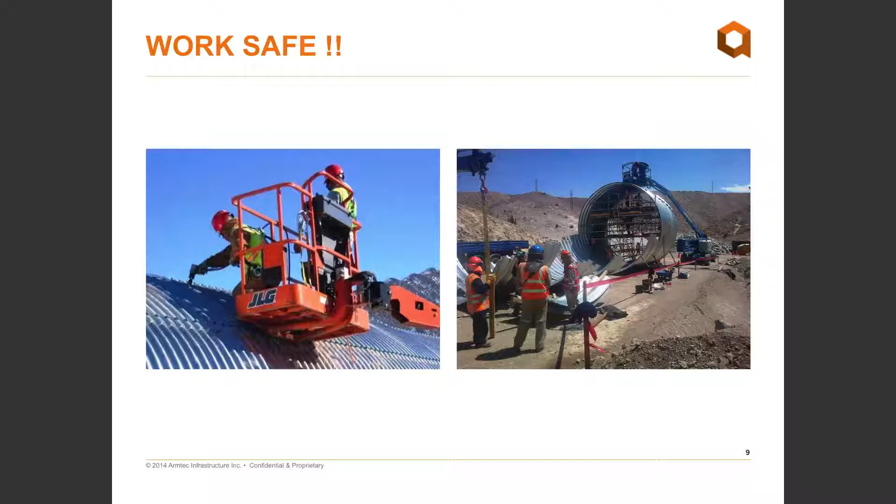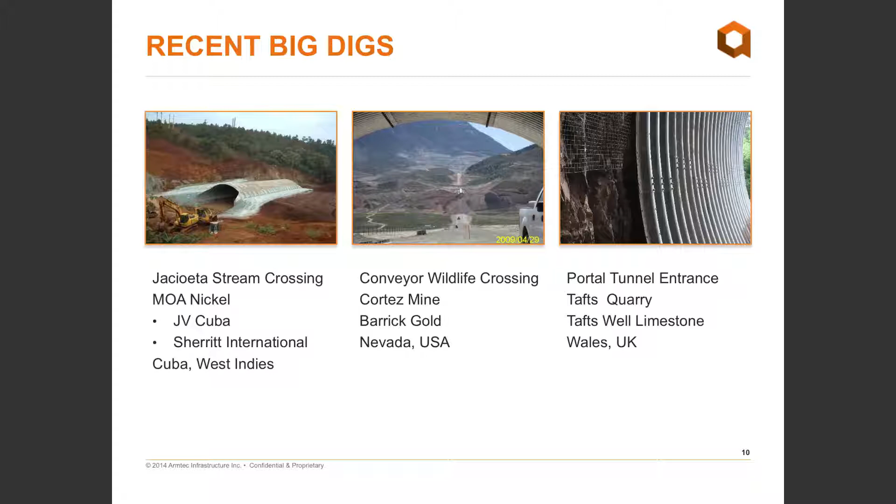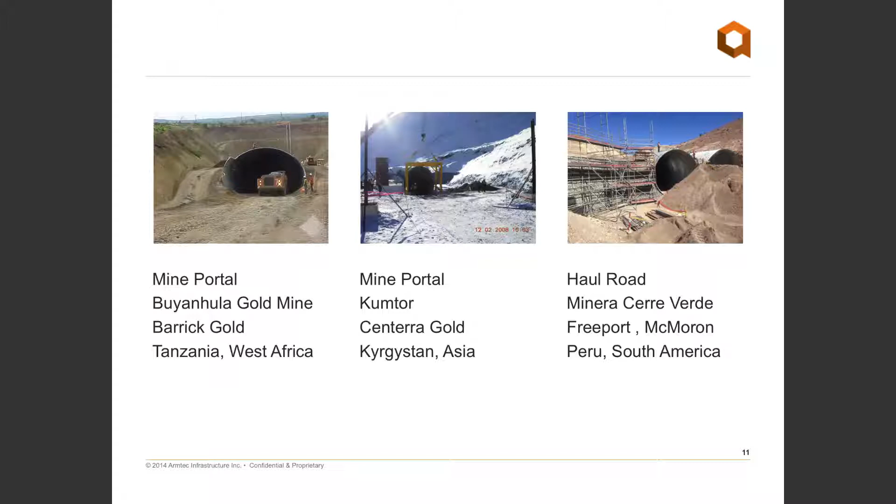All right, let's start with a quick look at some of Armtec's mining projects. At first, we had a Jacioeta stream crossing for Moa Nickel in Cuba, a wildlife tunnel crossing at Cortez in Nevada, some of the other projects in Wales, a portal entrance at Taft's Limestone Quarry, Bulyanhulu Mine Portal was indeed a big dig, some 30 meters deep in Tanzania, and one of the coldest portals high in the Tian Shan Mountains in Kyrgyzstan, the Kumtor Mine. And finally, Peru's longest running copper mine, Minera Cerro Verde, in Arequipa.

All right, let's get started by answering a very simple question. What is structural corrugated steel plate? We start with hot rolled plate, slit it to the correct length and width, then corrugate it into one of two profiles. The smaller profile showing above is generically known as structural corrugated steel plate. We call it multi-plate. The corrugation is 152 by 51 millimeters, or 6 inch by 2 inch, and was first developed by our predecessor Armco in 1931.

Underneath the multi-plate is what is known as deep corrugated structural plate, or bridge plate. If I use the term deep core, it's the bottom corrugation I'm speaking about today. It is truly a metric corrugation profile, 400 millimeters by 150 millimeters deep, and was launched by Armtec in the 1990s.

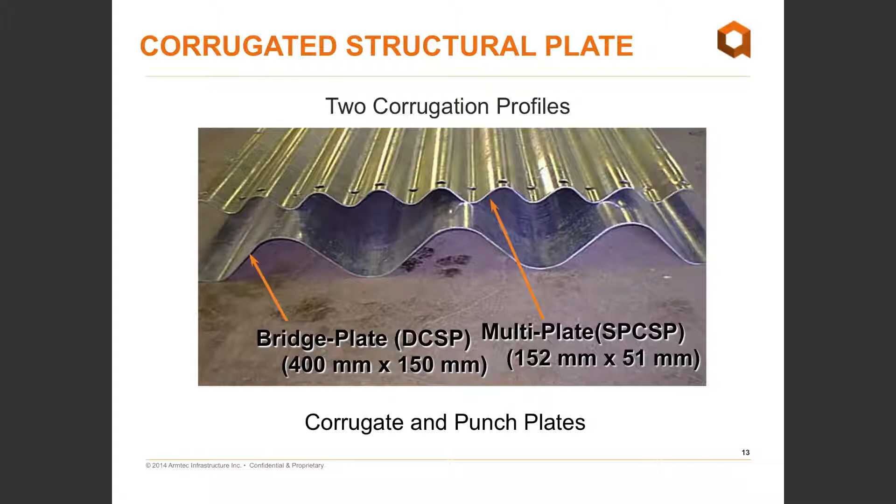After the plates are corrugated and punched, they're curved to the shape required. It's this ability to curve the plates which makes the product so versatile. By simply altering the curvature, we make a wide variety of shapes and styles which can be bolted to make the final makeup of the structure. Shapes can include circles, arches, ellipses, and high-profile arches.

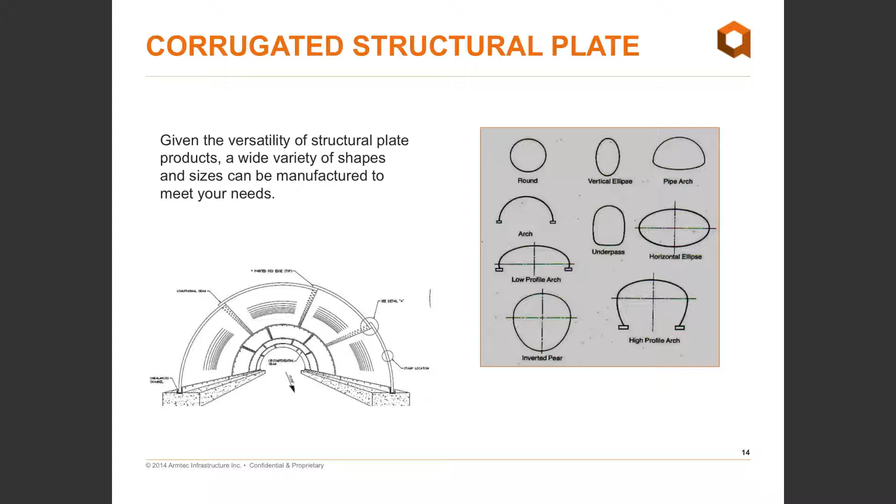After galvanizing, the plates are nested and placed on flatbeds into shipping containers. So whether you choose multi-plate or bridge plate, the structure is shipped in conveniently nested bundles, allowing easy delivery to remote sites.

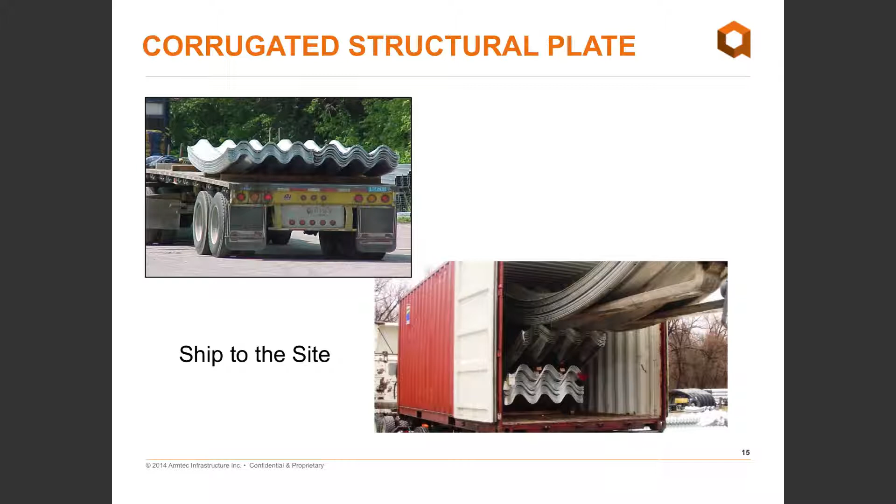Once on site, the plates are quickly assembled according to the drawings that we supply, and the pile of plates, in this case, becomes a bridge.

All right, let's talk a little about the history of the structural plate. Corrugated steel pipe has been around for over 100 years, having been developed in the late 1890s. Some 30 years later, in 1931, segmental bolted structural plates were introduced by our predecessor, Armco.

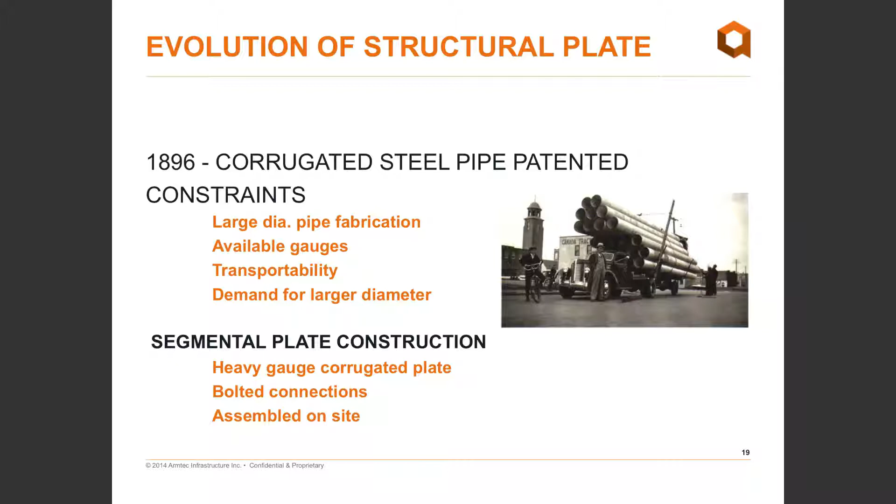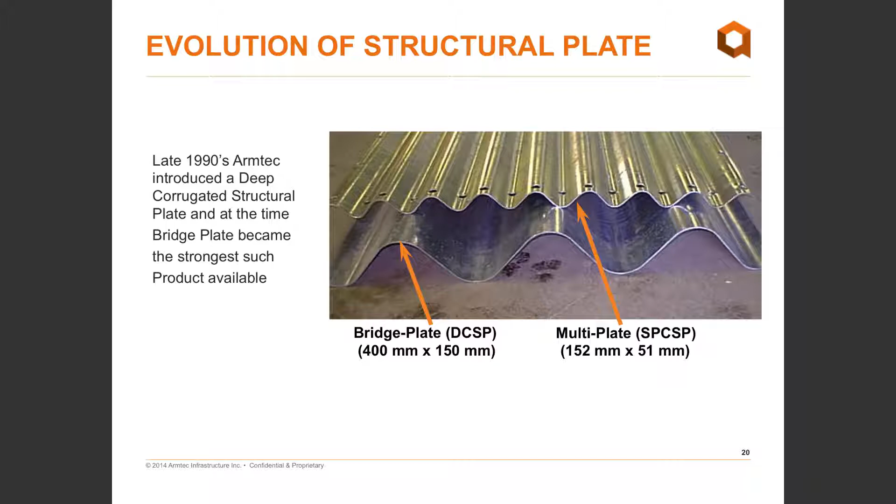From the 1930s to the 1990s, the multi-plate corrugation served the needs of the industry, but as heavier trucks, wider spans, and more demanding needs arose, Armtec developed deep corrugated bridge plate. Deep corrugated structures are 3 times stronger and 10 times stiffer than traditional structural plate, and that helped extend its use into the heavy mining sector.

Increased spans, heavier live loads, and lower cover could be better accommodated with bridge plate. While the added strength is important, extra stiffness also brings an advantage that we're going to talk about a little bit later.

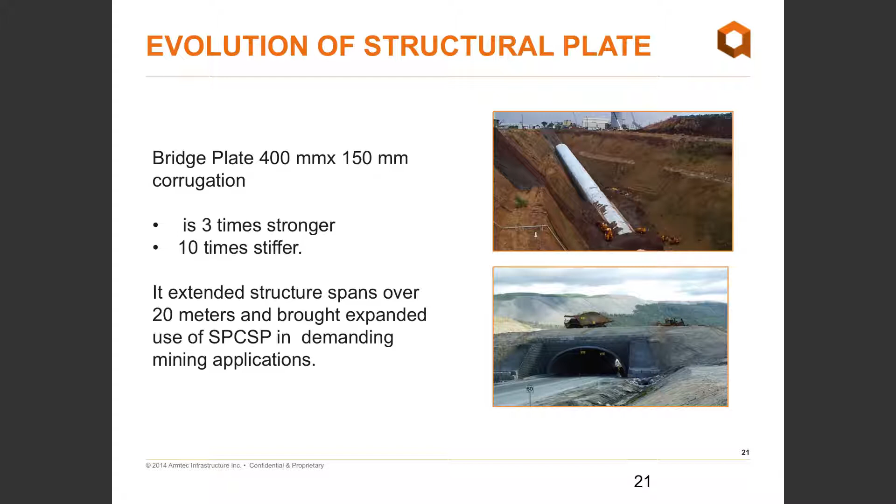A little bit to start on flexible steel design. Any discussion on the design of corrugated steel pipe must begin with the Handbook of Steel Drainage and Highway Construction Products. The original edition was published in the 1930s as the first handbook of culvert and drainage products. Several editions and over 80 years later, the handbook remains the primary source for engineers.

The book is published today by the Corrugated Steel Pipe Institute in Canada and is available through there. The gentleman certainly to talk to is Ray Wilcock.

Let's review the basic design procedures. In the 1920s, the original design procedure was set forth using the Marston-Spangler formula. Over the years, the design evolved into more sophisticated methods which recognized crushing and buckling. However, ring compression theory always has and still does remain at the core of the design.

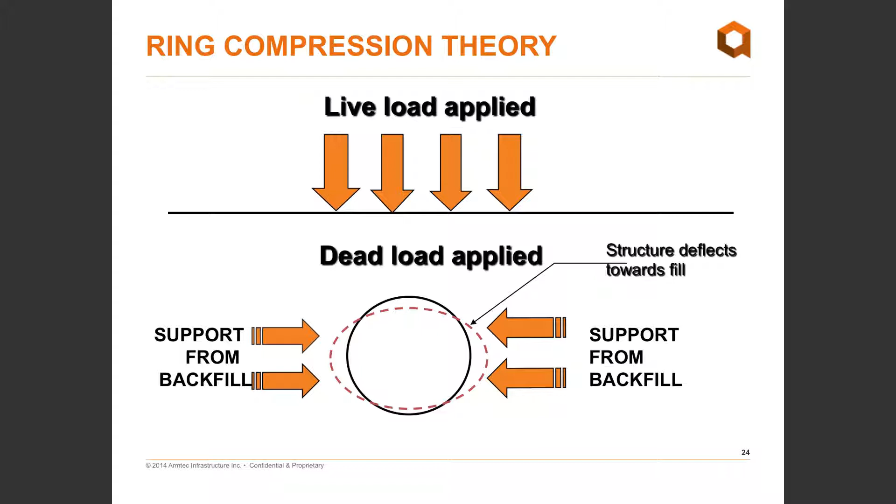In ring compression, a load is applied downward on the structure. The outward flex of the structure mobilizes the passive resistance of the soil and provides support. The thrust is distributed equally around the perimeter of the structure, and the pipe acts as a series of columns, each one in compression. Looking at this in the field, the thin wall pipe is highly effective in supporting axial compressive loads.

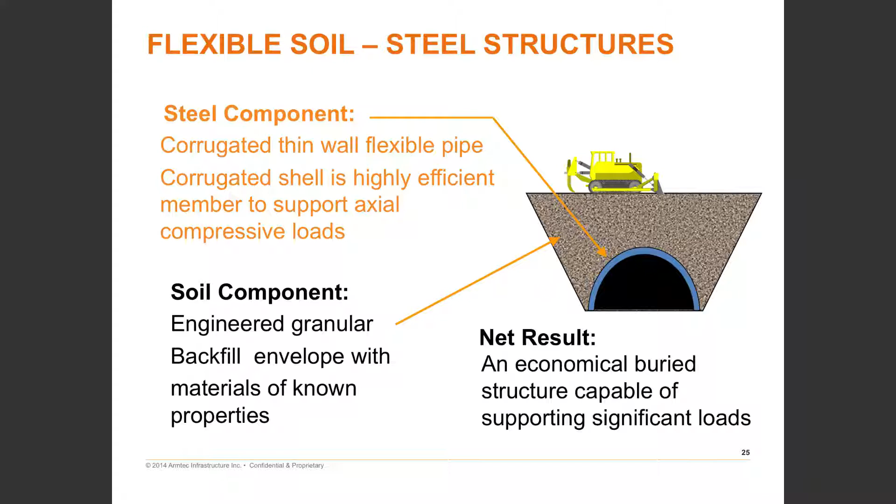To that is added an engineered granular backfill envelope compacted around the structure, with the net result we have an economical buried structure capable of supporting significant loads. Let's compare how both flexible and rigid structures depend on soil interaction.

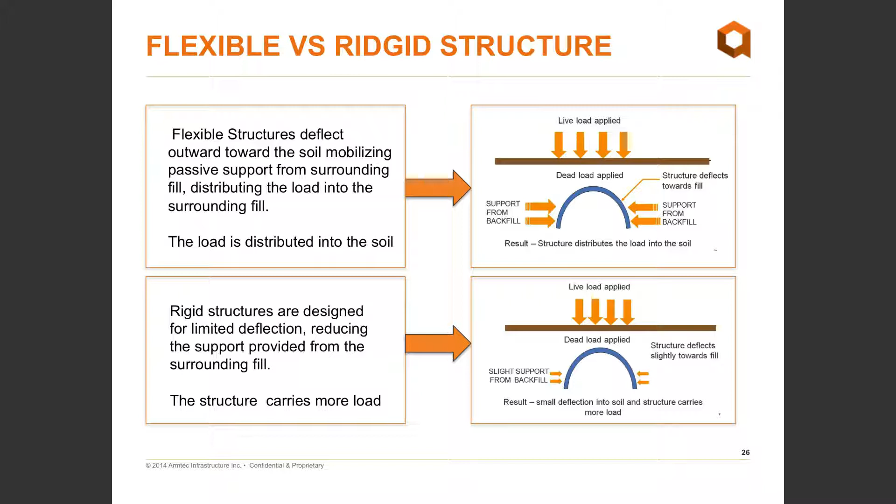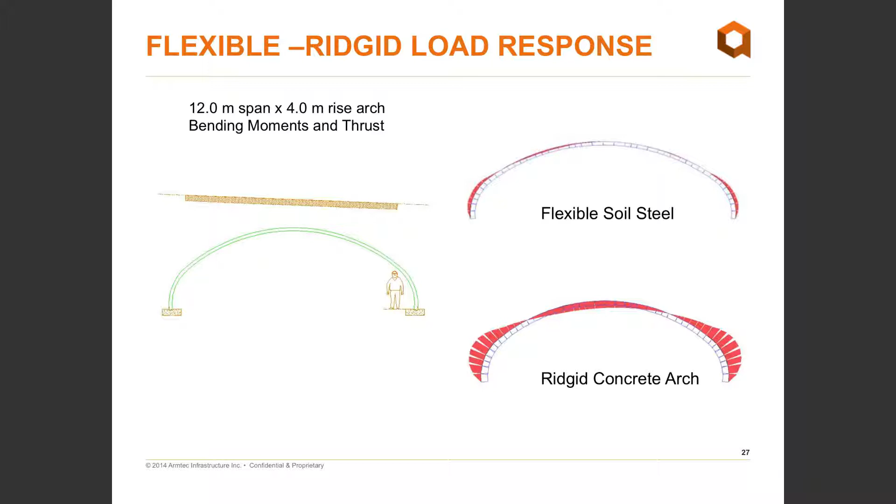A final look at this. This is a finite element analysis of buried 12-meter span by 4-meter rise, flexible and rigid structures. Bending moments and thrust in the flexible structures are lower, reflecting the distribution of the load into the surrounding soil. Contrast that with the rigid arch on the bottom, where the structure carries much of the load and the moments and thrusts are higher.

As discussed earlier, the Handbook of Steel Culvert and Drainage Products has served as the primary source for years for design. Today, the handbook is supplemented by modern-day bridge codes. Both the Canadian Highway Bridge Design Code, which I'll refer to as CHBDC, and the American AASHTO Code have extensive sections on the design of buried structures.

The handbook refers back and forth in general terms to CHBDC and AASHTO, but the many tables refer to the AISI method of design, AISI meaning American Iron and Steel Institute.

Often heavy mining loads present unique situations that are outside the design realm of any code. In these cases, computer modeling techniques such as finite element analysis are required. The principles of various codes are meshed with the design of finite element to meet the associated difficulties with large mining vehicles, high stockpile heaps, and deep portal cuts. It's imperative designers understand the use of FEA and how its output can be meshed with existing design codes. This is where we at Armtec are able to help in your design situations.

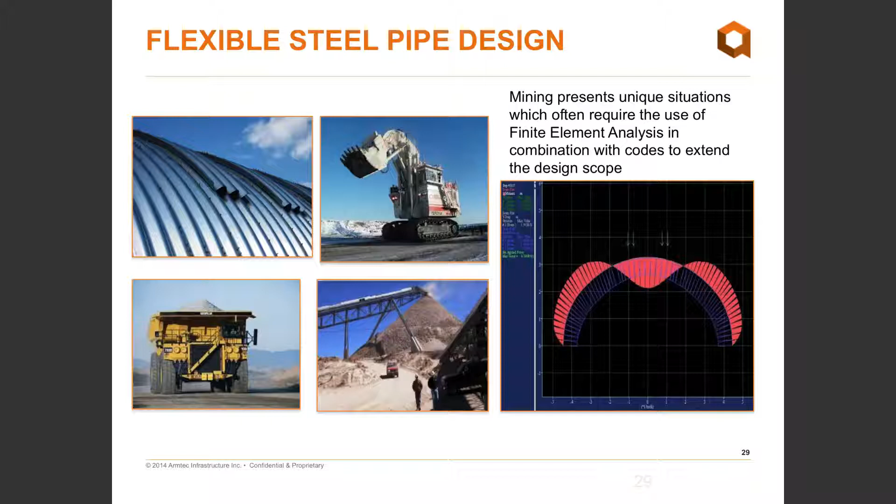One last issue before we get into the use of structural plate: it's important for users and designers to recognize the differences between deep corrugation bridge plate structures and traditional structural plate. Talking mainly about Canada, it's important to note that deep corrugation products are not manufactured in all countries, and this should be a consideration especially for those of you who may operate out of Canada but have mines overseas.

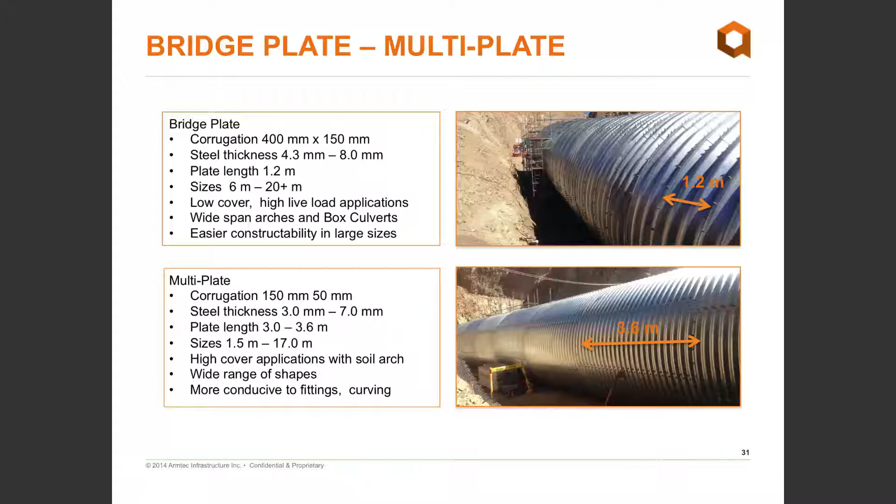We've talked about the corrugation profile differences before. Besides that, bridge plate has a thicker steel option, 4.3 millimeters to 8 millimeters, while multi-plate is 3 millimeters to 7 millimeters. Typically, plate lengths in bridge plate are 1.2 meters, as you can see in the picture at the top, while multi-plate may extend from 3 to 3.6 meters per ring installed. Bridge plates are normally used in low cover, high live load, wide spans, and box culverts. On the other hand, multi-plate has a wider range of shapes, typically smaller size structures, but it's much more versatile in terms of manufacturing fittings and curving the plates.

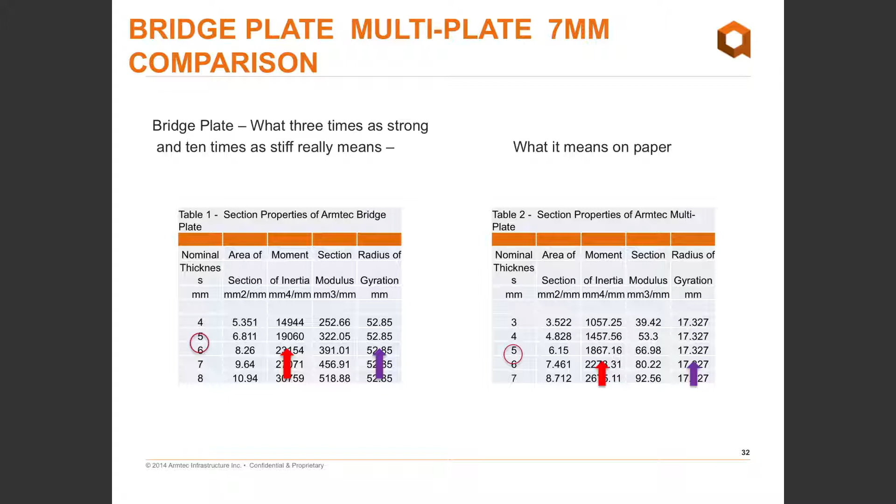More importantly, what does this mean in the field? In wider span multi-plate structures, there may be a tendency for the roof of the structure to sag unless held in place by cables or struts. It's extremely important for the structure to be held in place during the backfilling procedure. If the structure begins to flatten across the crown, it may attract additional load not accounted for. Multi-plate remains a good product for wide spans, but its assembly and shape control before and during backfill can be more challenging. Bridge plate, on the other hand, with its high stiffness, is able to withstand without any cabling or additional support, and is much less sensitive to backfilling.

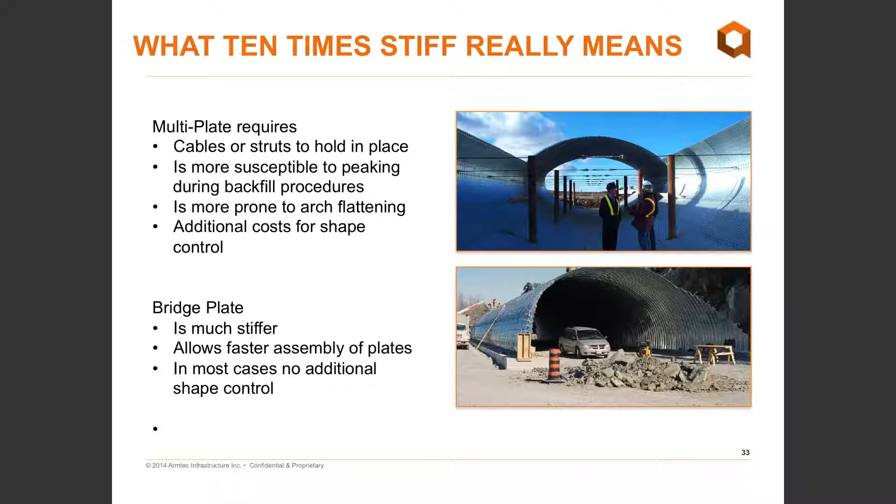Let's take a look at how structural plate products are used in the mining industry. First, we're going to look at mine haul roads and some of the considerations for design. These include live load, dead load, the width of the structure, the height of cover, the backfill material available, the span, what it's used for—stream crossing or grade—and also a little bit about earthquake load.

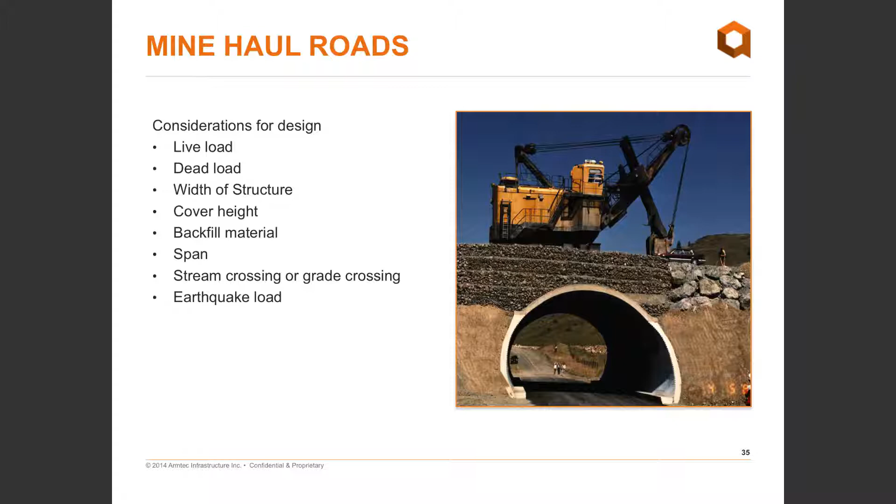Today's mining vehicles continue to increase in size and payload capacity, making careful consideration more important. Today we see vehicles up to 600 metric tons or more, and designers need to know the total weight of the vehicle, and secondly, whether the design is for loaded or non-loaded weight. The axle spacing is equally important as it defines the location of the load distribution throughout the backfill. Most manufacturers provide this information on their web pages, and you can get that actual spacing there.

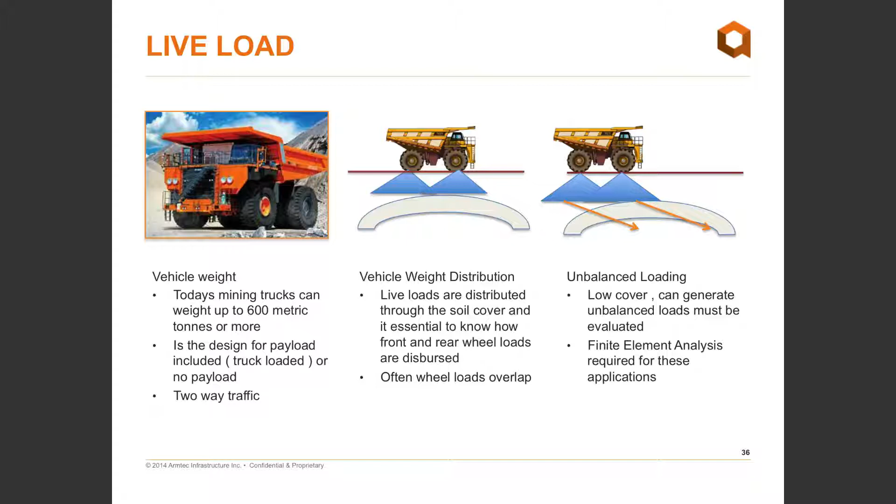A new concern has recently come into play. Today's mining vehicles may generate unbalanced load on the structure as it approaches it. Low cover, extremely heavy vehicles are part of this consideration. They tend to push the structure over, and this is one of those specific loads outside the realm of any design codes, requiring special finite element analysis. This isn't something that happens all the time, but it's certainly worth considering with extremely low cover and very high live load vehicles.

A couple other less complex but equally important considerations: two-way traffic on the structure. Keep this in mind - will there be two vehicles loaded at one time, heading in opposite directions? Is one loaded, is one not? Is it full payload, half payload? A good consideration of the situation could turn into a more economical solution for your owner.

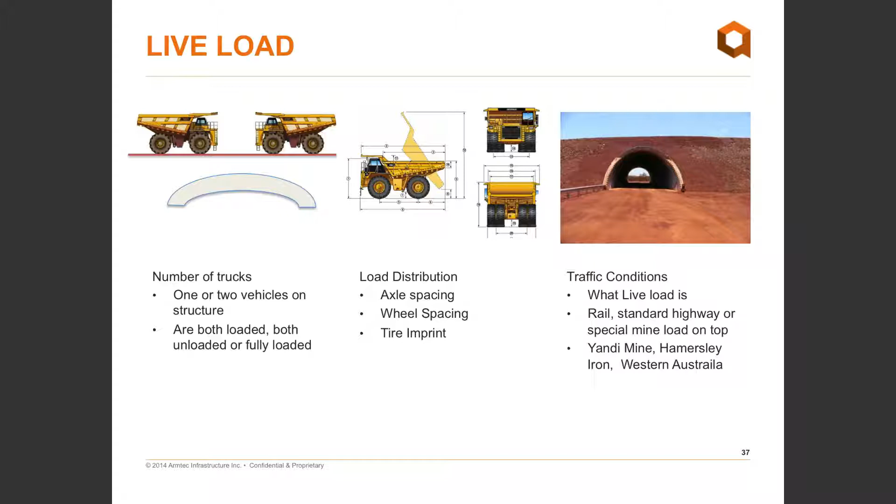We need to look at the wheel spacing as well as the axle spacing. The difference between the wheels is equally important as the axle spacing, as it distributes the load over the structure. And finally, what is where? Sometimes we get rail on top, regular highway on top, rail underneath, mining structures above and below. This particular structure at Hamersley Iron in Australia had mining vehicles both above and below the structure.

Let's look at other loads. Dead load is probably the most important again, mainly a function of the backfill density and its depth above the crown of the arch. In mining, many soil types come into play, and if possible, a good sample is useful to determine the actual density. When actual values aren't available, most codes have default numbers which can be clearly identified as part of the design. Secondly, span and rise are probably the most important factors affecting the final design, and ultimately the cost.

In the case of stream crossings, good hydrologic data will help size the structure, and the requirements will end up with the most economically available solution. For underpasses, a realistic clearance box required is always helpful.

Thirdly, how high can we make the structure? What's the cover over top? Overpasses with low cover are generally economical for traffic flow, but costs increase as the cover goes down. We all know haul trucks typically operate at maximum grades of 15%, and any means of reducing this can turn into large fuel savings. So we'll try to keep that cover down, but all of these factors should be examined to provide the most effective solution.

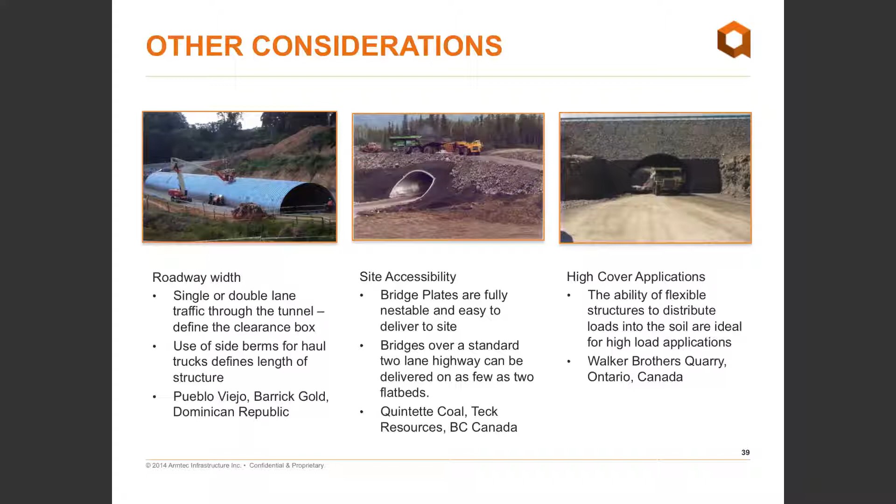A little bit about seismic and earthquake as it relates to the mining sector. Many times mines find themselves in potential earthquake zones. In Canada, public roads fall under the CHBDC, the Canadian Highway Bridge Design Code, and thus require review of earthquake loads. That load is based on inertial forces associated with a seismic event having a 10% probability of exceedance once in 50 years. In CHBDC, regions are assigned a zonal acceleration ratio, which forms part of the calculation. The methodology for calculating the load is well defined in CHBDC and is based on two-thirds of the horizontal ground acceleration times the dead load thrust.

In mine haul roads, the dead load thrust is often small compared to the live load, and it may not be significant. However, it needs to be checked. For roads on private property, the decision on whether to include it is generally up to the owner. For roads designed under AASHTO code in the United States or other jurisdictions, the rules for earthquake loads apply only within 10 miles of recognized fault lines. Again, this becomes the discretion of the designer and how he wants to use this information. I'd be happy to provide more details on this for those who may wish to discuss later.

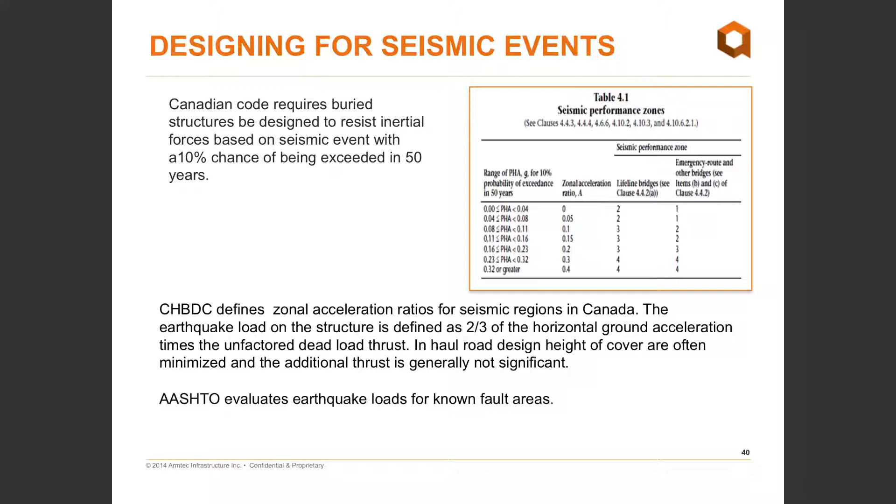First of all, they're extremely easy to maintain. They can be extended in the future if need be. There are no problems with bridge deck freezing, which is extremely important, especially if you have heavy mine vehicles running across the top deck. Life expectancies can generally match the life of the mine. They're easy to transport to remote sites, and they come in a wide range of sizes.

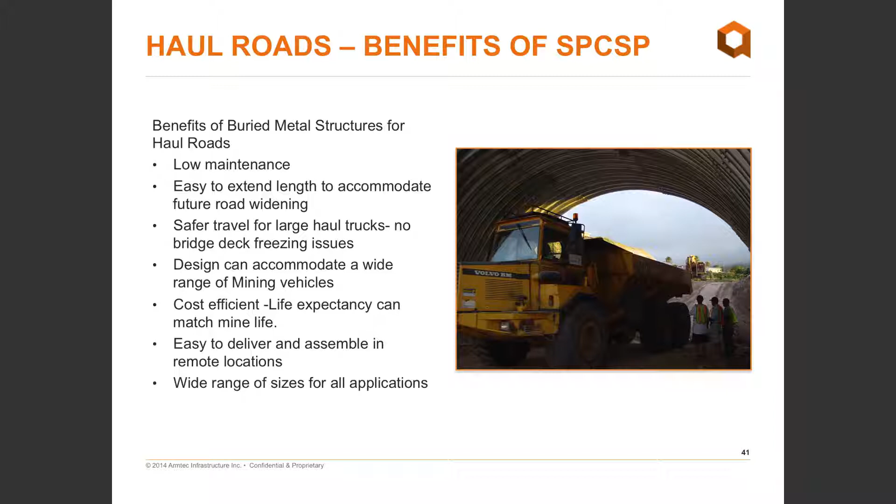Good afternoon or good morning, everybody, depending on what part of the country you're joining from. I will begin my portion of the webinar with another use of structural plate products in the mining industry, this time for mine portals.

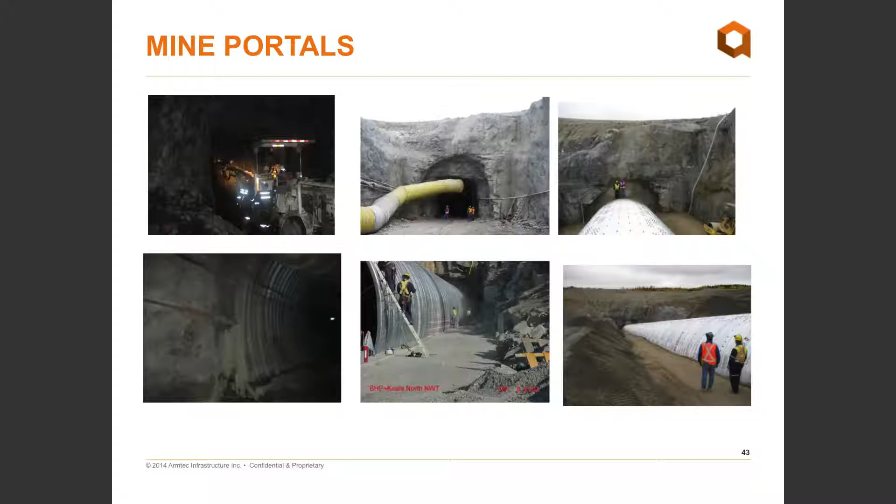Armtec mine portals are generally constructed of bridge plate or multi-plate to form the desired shape. The most common shapes used for mine portals are high-profile arches and semicircular arches. It is possible, as Doug alluded to, to design these structures for very high cover applications, if necessary.

Mine portals are commonly used to prevent surface water from entering the mine, to provide ground support and safe passage of surface roadways over the mine entrance, and also for egress from ground level to the underground mine face, for equipment and mine vehicles, manpower, ventilation pipes, and also utility lines.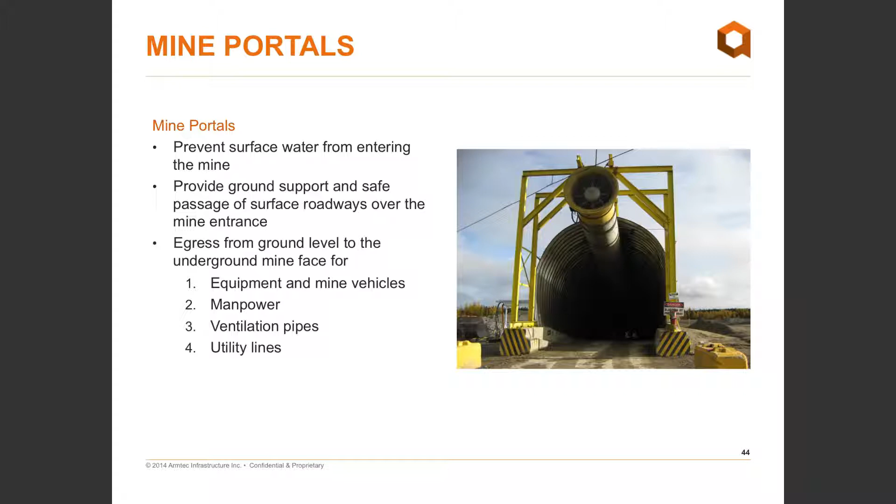Some of the things to consider when designing your mine portal, of course, are your egress requirements, whether you need to accommodate single or double lane traffic, if you need to take special precautions for pedestrian traffic, utility lines, or a combination of all these factors.

Another consideration is the location of the mine face. The depth will give you the height of cover loading, which is critical to the design of the portal. It will allow you to set the grade of the tunnel ramp. It defines the structure length and can define the solid rock above the entrance.

You will also need to consider constructability, things such as the amount of rock removal, the mine face portal connection, and whether or not you will construct the portal with or without the free flow of traffic into the mine.

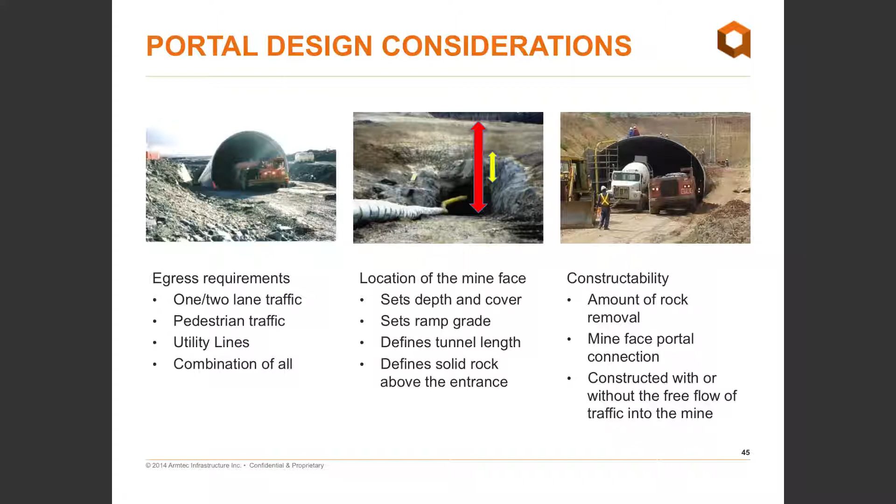Other things to consider are if an end treatment is required. These types of end sections include a vertical pre-cut or a vertical elbow.

Safety is always an important consideration when selecting a mine portal. Having said that, do you need to include a safe chamber at one or more locations in the portal, or allow for any vertical riser access points? These safe chambers shown here are similar to those used at Newmont Gold's Subika mine in Ghana.

The size of the rock cut will determine how much select backfill will be required in the engineered backfill envelope surrounding the structure. Acceptable backfill for the backfill envelope, commonly referred to as the critical backfill zone, is well-graded granular with angular grains. Gradation requirements will be shown on your installation drawings, but generally it will be 3-inch or 75 millimeter minus material. This material must be placed in 200 millimeter lifts and compacted to 95% standard proctor density.

Armtec's design team can help you select the shape based on a required clearance box, thus ensuring you have the necessary space required in your portal. Again, keep in mind if provisions need to be taken for pedestrian traffic or utility lines.

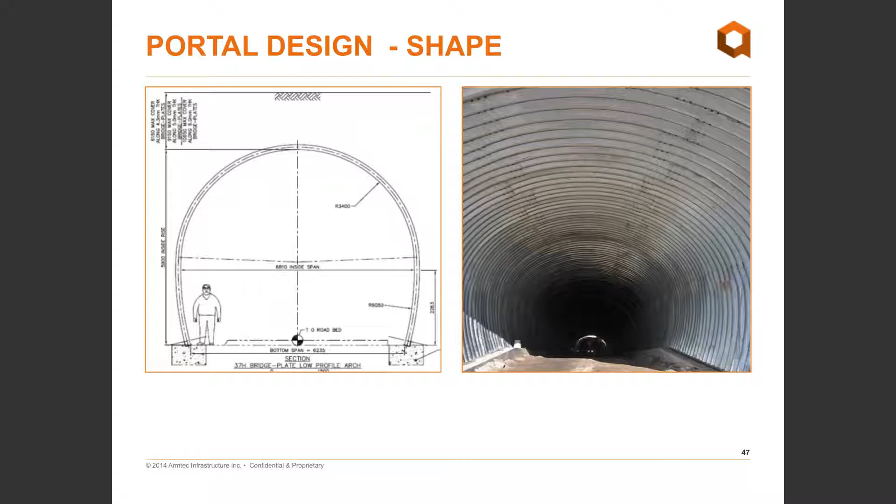However, assuming the rock wall is very stable, the room between the tunnel wall and the rock face can be as little as needed for assembly and backfill. This will help reduce blasting the cut and save the owner money.

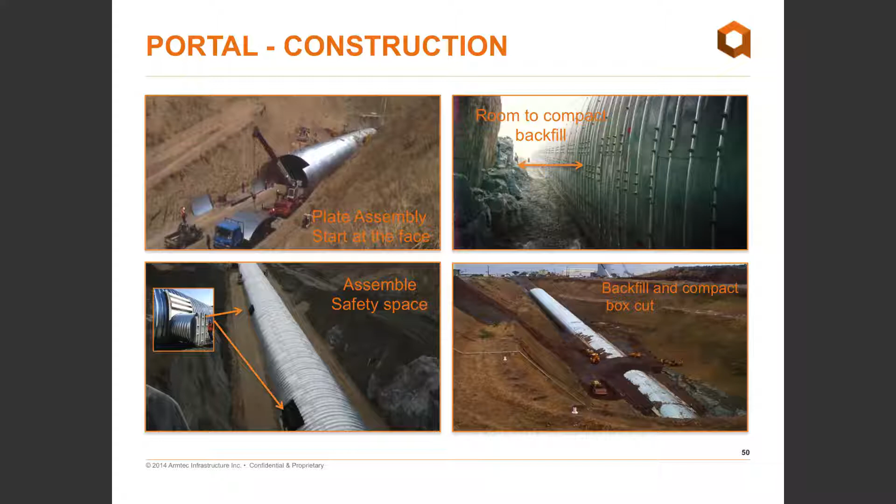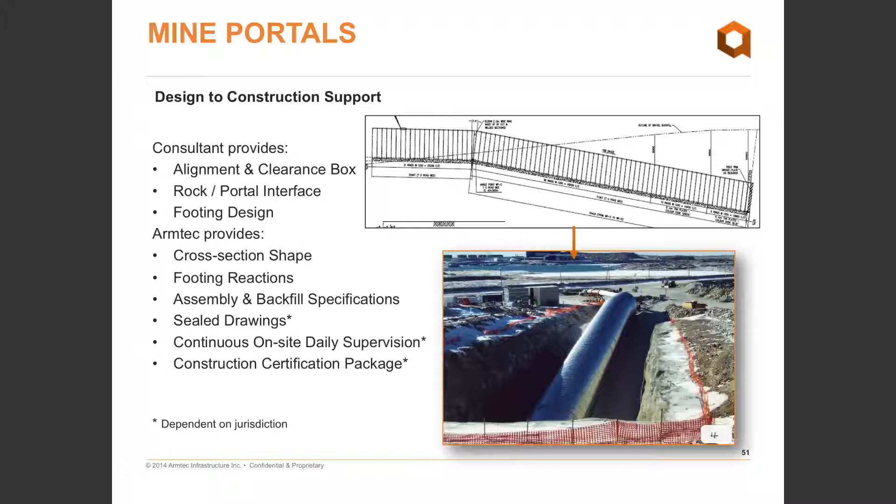To summarize our discussion on mine portals: the consultant or owner would provide Armtec with the alignment and clearance box of the portal, the rock portal interface, and the footing design. Armtec will then provide a cross-section shape, footing reactions, assembly, and backfill instructions and specifications. We are also able to provide sealed drawings if required, and on-site supervision by trained field staff.

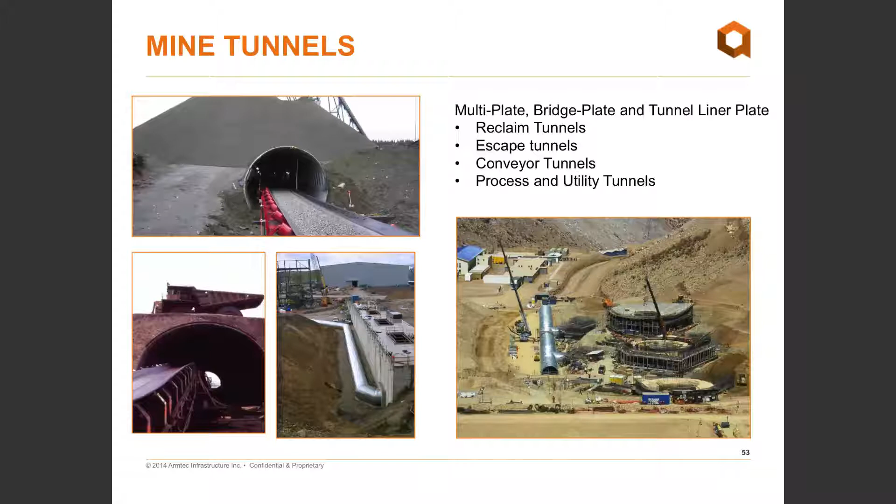Another application for structural plate is mine tunnels. Again, multi-plate and bridge plate can be used in these applications, as well as tunnel liner plate. Reclaim tunnels, escape tunnels, conveyor tunnels, and process and utility tunnels can all be constructed using structural plate. An alternative to the multi-plate and bridge plate discussed earlier is a corrugation profile we manufacture known as tunnel liner plate.

Tunnel liner plate is a corrugated steel, two-flanged sectional lining system designed for use primarily in soft ground tunneling and in relining existing conduits under highways and railroads. One advantage is that it can be completely assembled from inside the tunnel and grouted at regular intervals as the tunnel progresses. It continually generates ring support, providing a safe launch area for workers and equipment to advance. It is available in a wide variety of shapes and sizes, beginning at 1.3 meters in diameter, and is also provided in 500 millimeter plate widths.

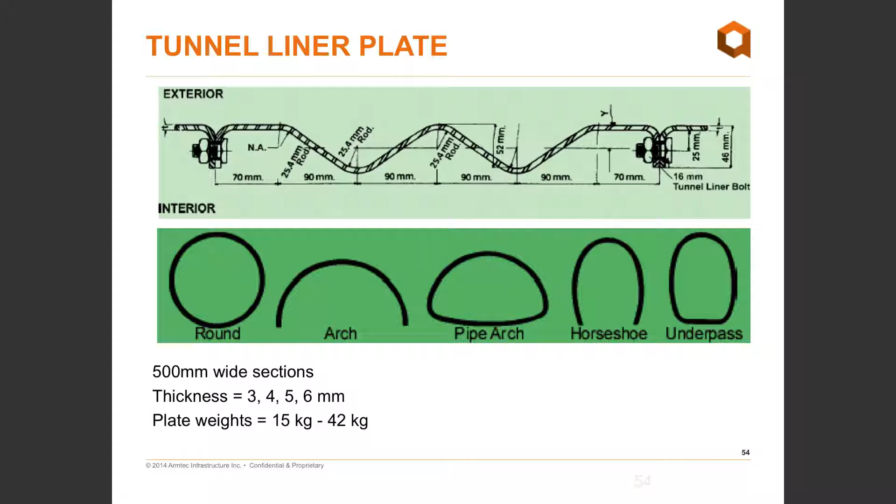When using structural plate for mine tunnels, certain parameters should be considered. The live load, dead load, and whether there is a varying load condition should be examined. You would also consider what the tunnel is being used for, which helps determine what size and shape is required to accommodate the machinery or personnel using the tunnel. Also, will there be pipe racks or conveyors attached to the structure? We need to consider this during the design stage to ensure these don't introduce unaccounted for stresses to the structure. Lastly, what type of access points, if any, are needed in the tunnel?

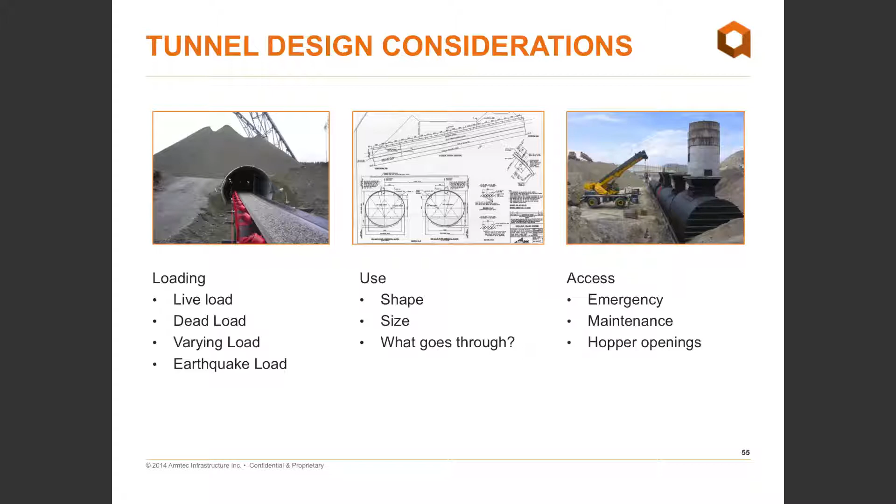James, I think you're unmuted there now.

Next, when looking at escape tunnels, the versatility of Armtec structural plate can provide the owner with a wide range of options. Elbows, hatchways, or safety spaces can be added where needed. We have been involved in the design of many unique applications over the years, so please don't hesitate to ask your local representative for assistance, no matter how specific your site requirements may be.

For conveyor and stockpile tunnels, our range of shapes and sizes, combined with segmental bolted plate construction, allows for installation over live lines. Economical designs can be produced when Armtec's engineering team is provided with the actual stockpile height or overburden, as thickness of steel can vary greatly depending on the surcharge over the tunnel. Again, maintenance access points can be added where necessary. The structure on the left is part of a 4-kilometer-long conveyor tunnel in Nevada.

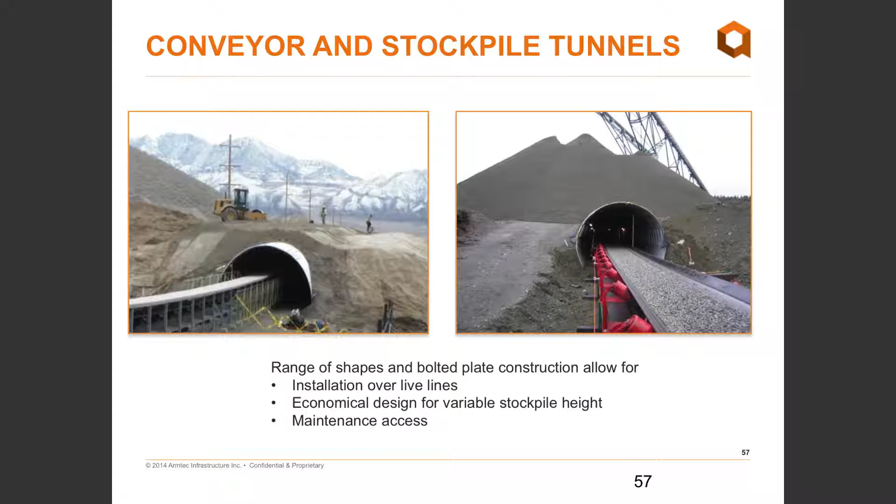Special considerations can be taken to allow for ore to be placed into the tunnel through reinforced openings in the structural plate wall. Reinforced hopper openings are designed by Armtec as per ASTM A998/A. In the tunnel on the left, a concrete floor has been poured into a round pipe. This often makes for a more favorable design as opposed to an arch on footings. The designer should always remember to allow proper side space alongside the conveyor to accommodate maintenance needs.

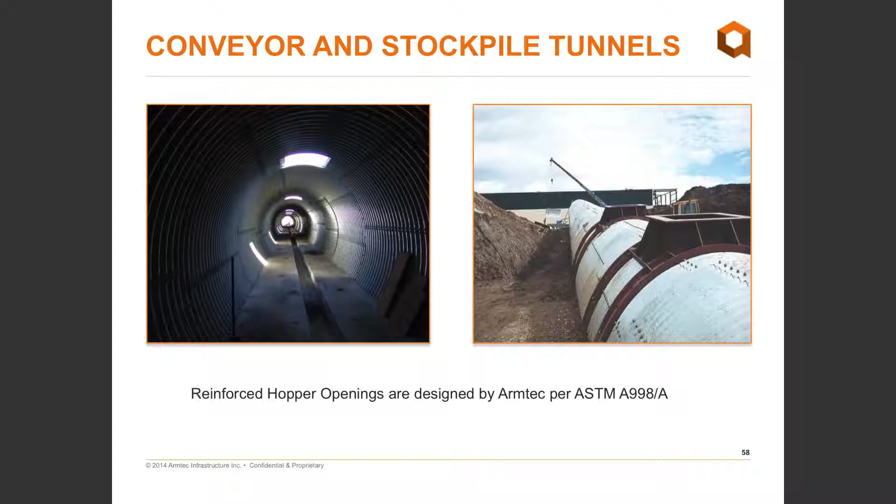As with all other tunnel offerings, process tunnels can be supplied with T's or stubs. These special fittings are designed and shop fabricated to meet the various needs of the client's site. Strict regulations and quality control processes are followed by Armtec at all times. Again, engineered drawings are provided to show the placement and assembly of these specialized components.

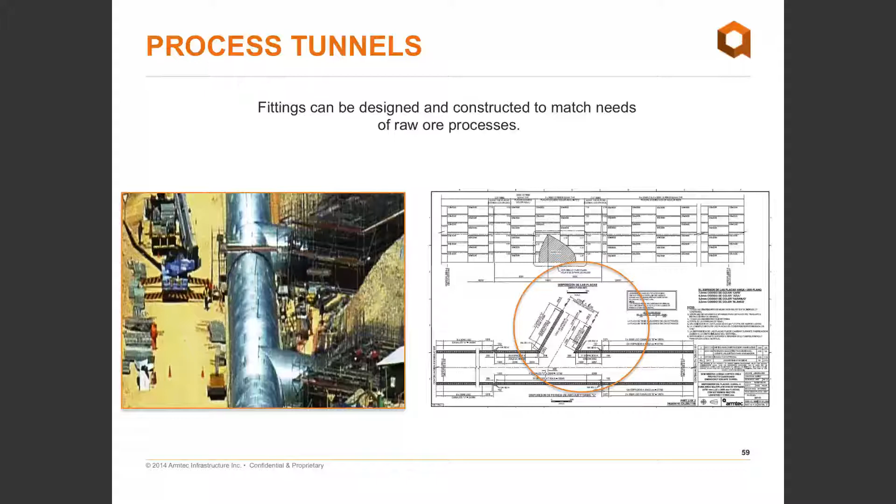Another important use of Armtec structural plate products is for rockfall protection. Armtec RAISEBORE liners provide a safe, easily installed, and economical lining for raise construction by the boring method. Diameters ranging from 1,200 millimeters in lengths up to 120 meters can be installed using semicircular sections. RAISEBORE liners are constructed using corrugated steel sections in metal thicknesses ranging from 2 to 4.2 millimeters. The sections are bolted together to form a complete ring, and the lining is then lowered into place. The space between the liner and shaft is then grouted to provide protection from falling rock. Using this method, no personnel are required to enter the unprotected portion of the RAISEBORE itself. Armtec RAISEBORE liners can be supplied with a lowering ring, ladders, platforms, steel skids, and other accessories as required.

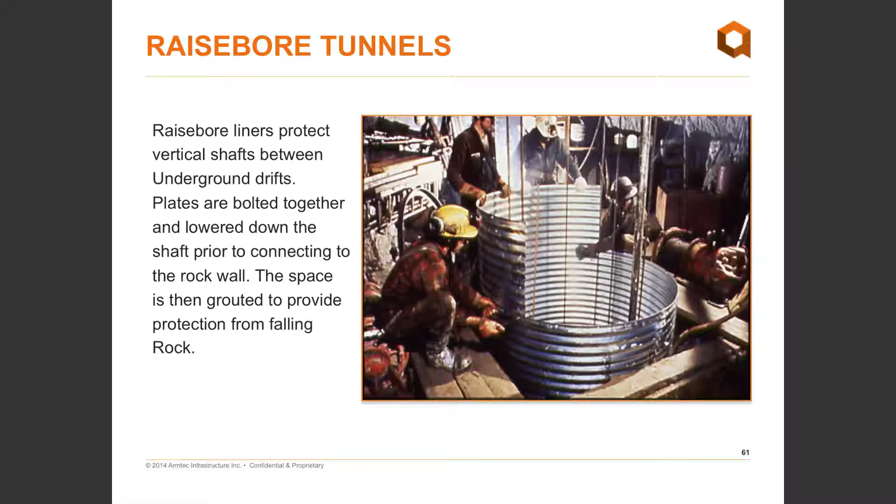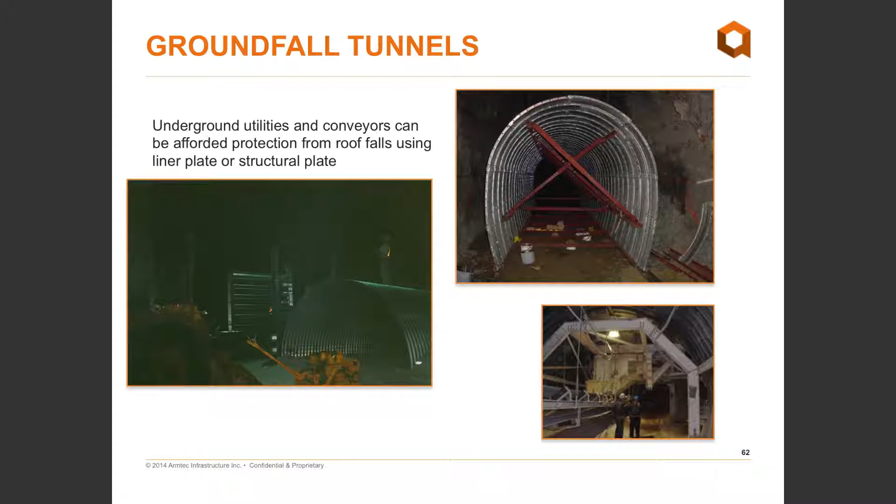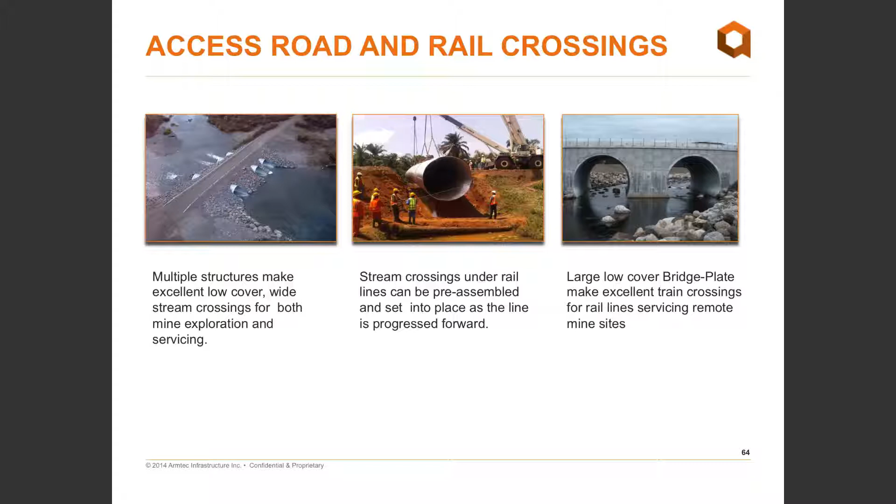Stream crossings under rail lines can be pre-assembled and set into place as the lines progress forward, as shown in the center photo. Large bridge plate round pipes make excellent train crossings for rail lines servicing remote mine sites. The photo on the right was taken at Bloom Lake, in or near Labrador.

I'll now take you through the steps required to assemble a typical bridge plate arch. The arch that I'm showing here was used as a stream crossing. This particular arch had a span of 11.34 meters and a rise of 6.55 meters. The project name is Two Creek, located in Alberta.

The equipment used on this site consisted of one small crane and two man lifts, one large crane, two 4-foot bars which are supplied with bridge plate structures, drift pins, cable and wire jacks, air wrenches, and hand wrenches.

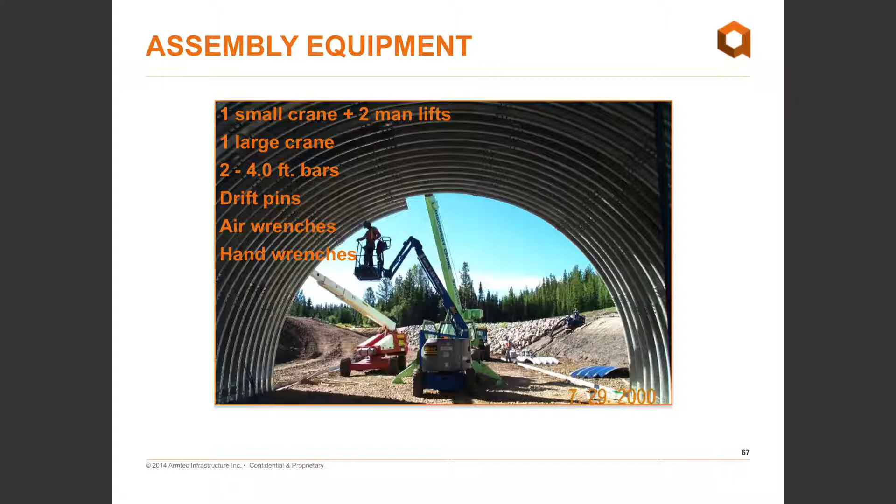The first thing to do is to sort the plates on site. This makes it easier to pick the right plate and ensures that there are no errors in the assembly of the arch. It also speeds up assembly time if you can establish a system of which plate to use next.

Your installation drawings will use specific terminology to identify various plates used to assemble the bridge plate. An example of this could be a 7H LFP. The plate designation of 7H indicates the net covering length, where H is 425 millimeters. LFP denotes a long footing plate. Other abbreviations you may encounter are SFP, for short footing plate, and MBP, for main barrel plate.

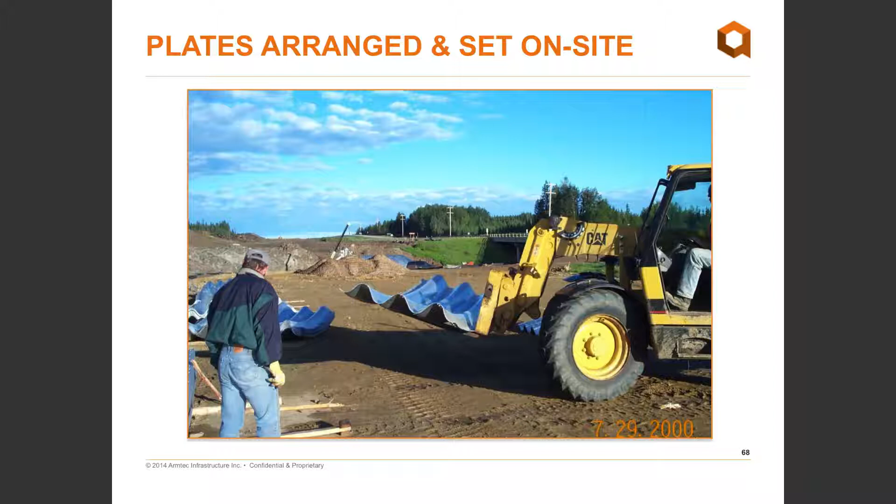Here you can see the plates are attached to an unbalanced footing channel made of steel. Armtec manufactures this unbalanced footing channel, and it is installed into the concrete footing by the contractor. We specify the spacing between channels and the entry or re-entry angle. Positioning of the unbalanced channel is key to a successful installation.

If you do not install the channel as per the drawings specific to your structure, it may make plate assembly extremely difficult to near impossible, as the bolt holes in the plates will not line up as intended. This particular structure has an 8.9 degree re-entry angle.

As you can see in these photos, the first two rings of the structure have been pre-assembled horizontally on a flat and dry staging area. Bolts are to be secured but should not be fully torqued.

Lifting the two-ring pre-assembly requires a 4-point lift. An appropriate size crane must be determined by the erector and be capable of lifting the two-ring pre-assembly safely into the footing channels. Armtec can and will provide the weight of these two rings. Once positioned properly, it is bolted into the footing channels.

After the first two rings are...

Just had a question. Yeah, just had a question come in from the last slide.

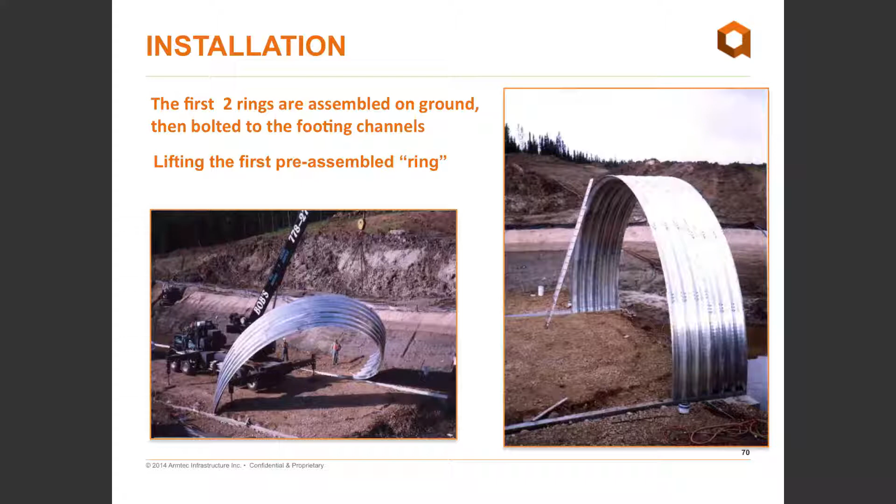How do you assure the entry angle is perfect at 8.9? What I've seen a lot of contractors do, when they form up the footings, is put sections of 2x4 across the top of their footing formwork, and cut the correct angle for the unbalanced channel into those cross sections. Essentially, the unbalanced channel, complete with the anchor bolts, will hang there in the correct position. Then you pour the concrete around the unbalanced channel and fill your footing, and it's set into the concrete at the correct angle.

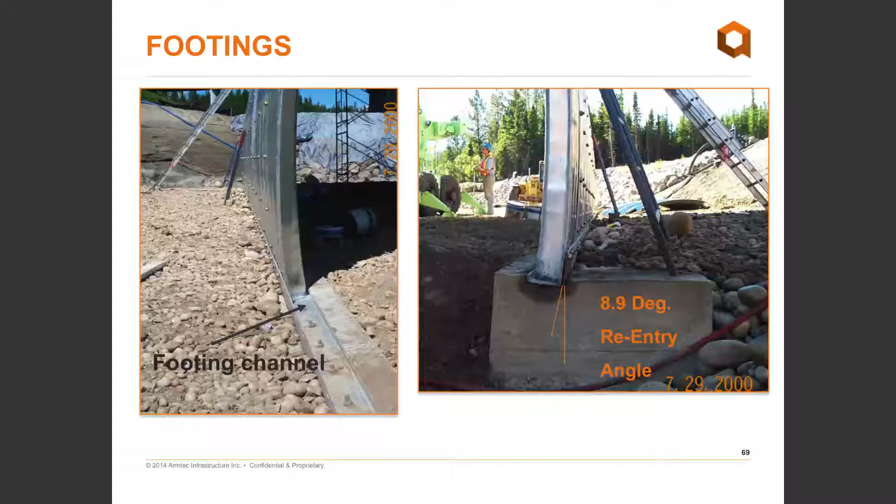Okay, thanks for that, James. Thanks.

After the first two rings are in place, subsequent assembly is done one plate at a time, working up from each footing towards the top of the structure. Partial ring sub-assemblies can be considered, reducing bolting time in the actual work area. Consult your on-site Armtec representative for suggestions.

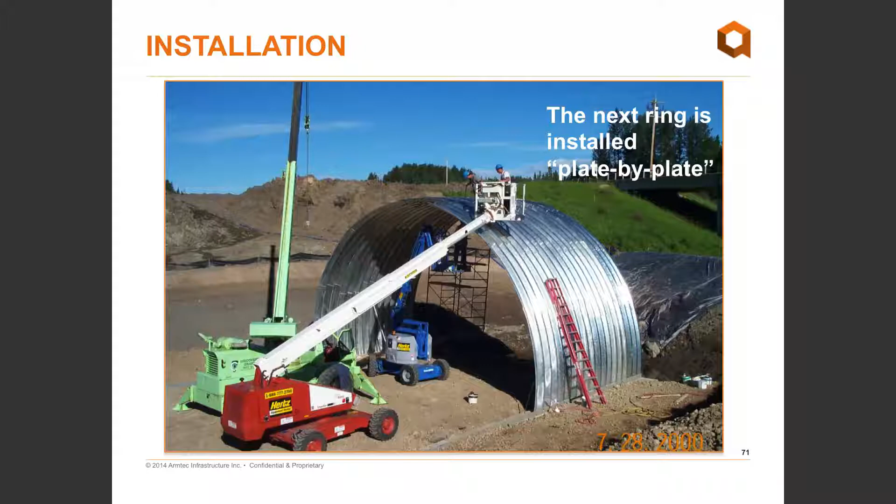Plate assembly continues here in this photo. As this is a stream crossing, assembly of the plates began at the downstream end to ensure proper plate lap with the direction of water flow.

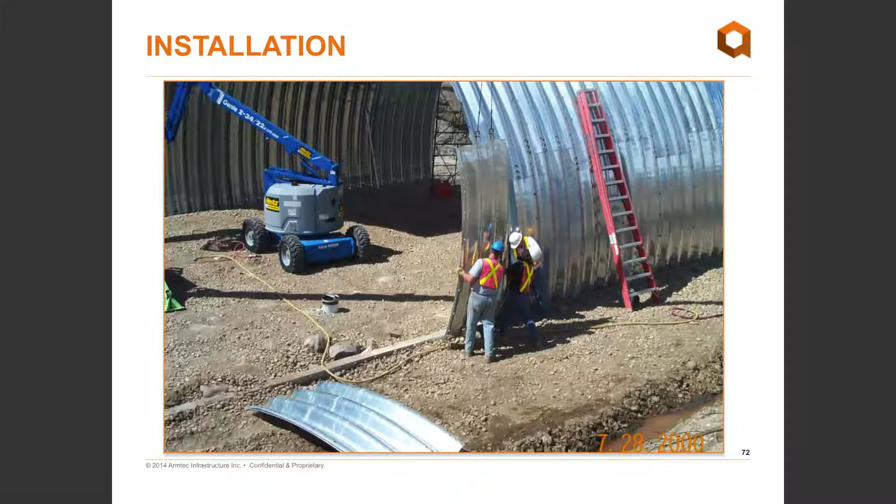This company used two elevating platforms or man lifts, a very efficient method of construction. Where this equipment cannot be used, scaffolding can access the obvert or crown of the structure. When the sidewalls have been installed from the ground up, the top plate in the ring is the last to be installed. Armtec's quality manufacturing is the key factor in this type of assembly.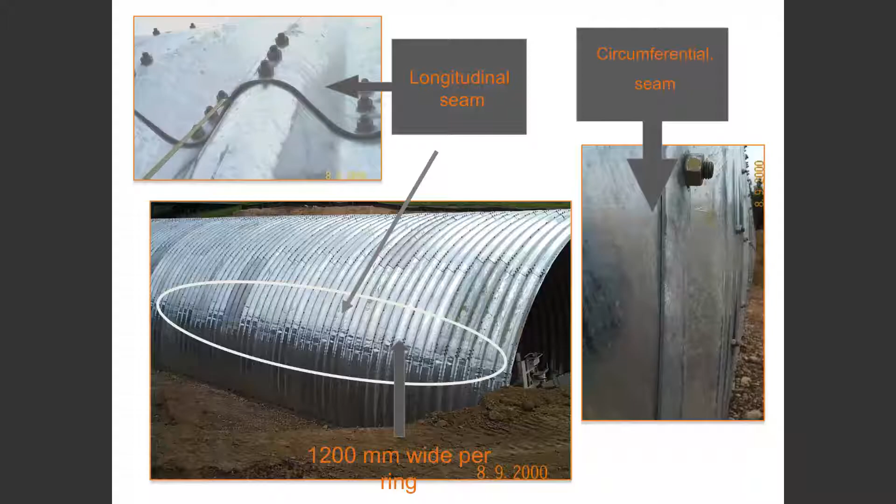The assembly is now complete. Bolts are checked for the required torque, which is 150 to 250 foot-pounds. Backfill cannot be placed until the bolts have the required torque, as compactive efforts could cause undesirable changes to the structure's dimensions. Once this has been completed, the structure is ready for backfill.

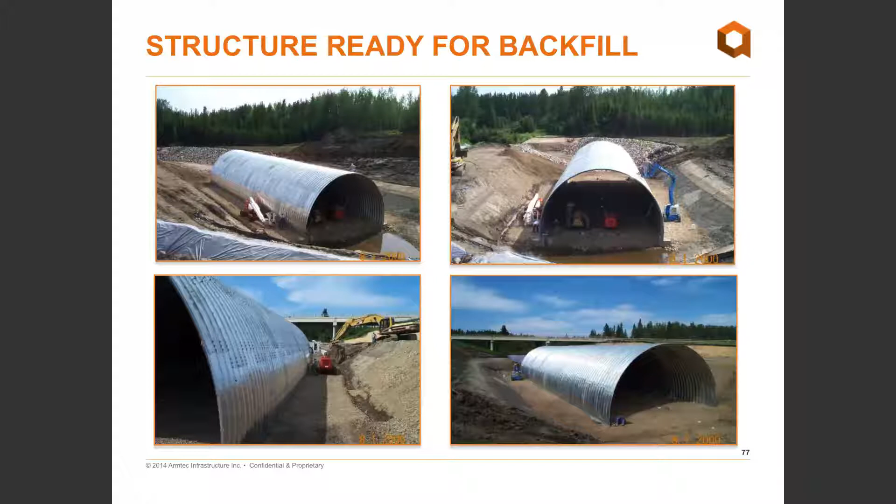Backfilling proceeds with the placement of select engineered granular material in maximum 200 millimeter uncompacted lifts, even for the heaviest vibratory rollers. Fill depth must be maintained approximately equal on both sides of the structure at all times. Care must be taken to have no more than 2 lifts, or 400 millimeter differential, from one side of the structure to the other. Material is to be compacted to 95% standard Proctor density.

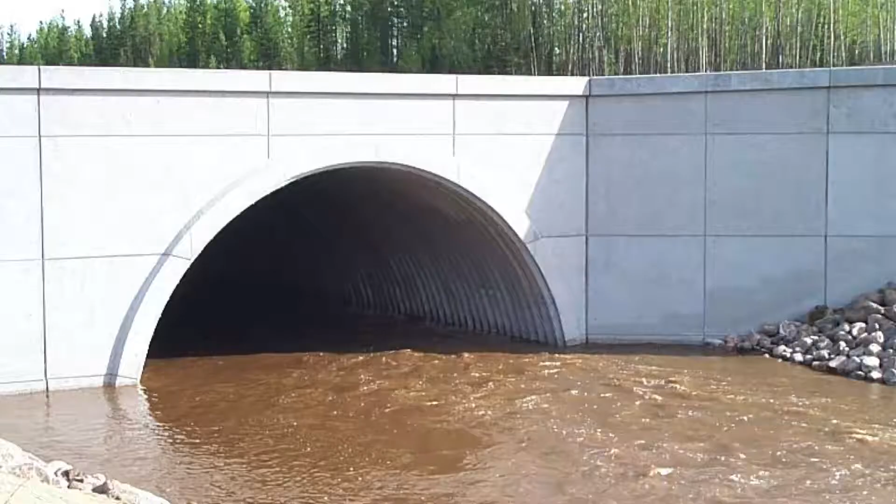Here's a photo of the finished structure. As you can see, a wire mesh headwall system complete with concrete face panels was selected for the end treatment of this structure. A variety of retaining wall systems are available from Armtec and can be seen extensively in an upcoming Armtec webinar on December 12th, entitled Armtec's Earth Retention Solutions and Overview. This webinar will be presented by Doug Lowry and Ron Perico.

To finish up my portion of the webinar, we will discuss estimated material service life of structural plate. Specifically, I will focus on a coating which we can have applied to our structural plate products to increase the estimated material service life.

The last decade has introduced polymer coatings for buried plate structures. Armtec's trade name for polymer coating is StrataCat. Polymer coatings are a second barrier coating applied for further protection of buried elements. Comprehensive research and testing recognizes that polymer barrier coats broaden the allowable range of environmental parameters known to negatively influence the estimated material service life of buried steel structures.

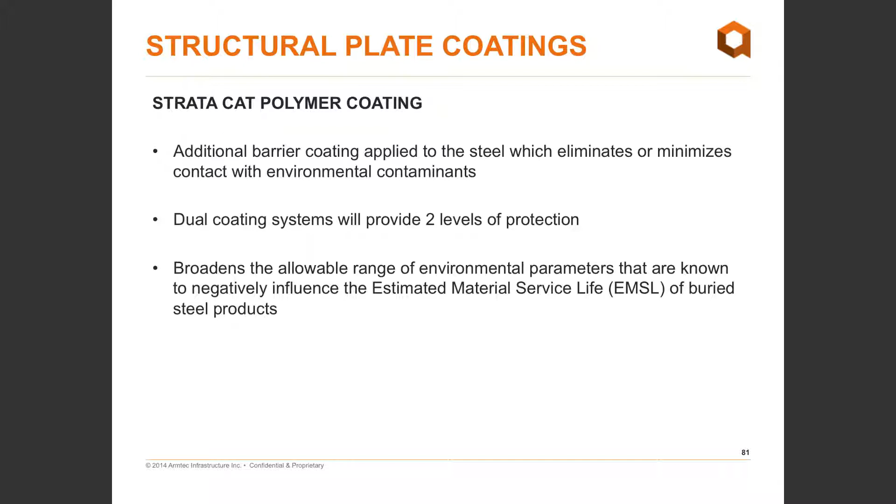The 4-step polymer coating process entails diligent surface preparation to eliminate mill scale, followed by an 8-stage pre-treatment wash of the base steel to ensure optimum adhesion of each subsequent coating layer. This is followed by the application of a zinc-rich base layer to a thickness of 1.5 mils per side. The copolymer is spray applied to individual plates, which then pass through ovens to complete the bonding to the zinc base coat.

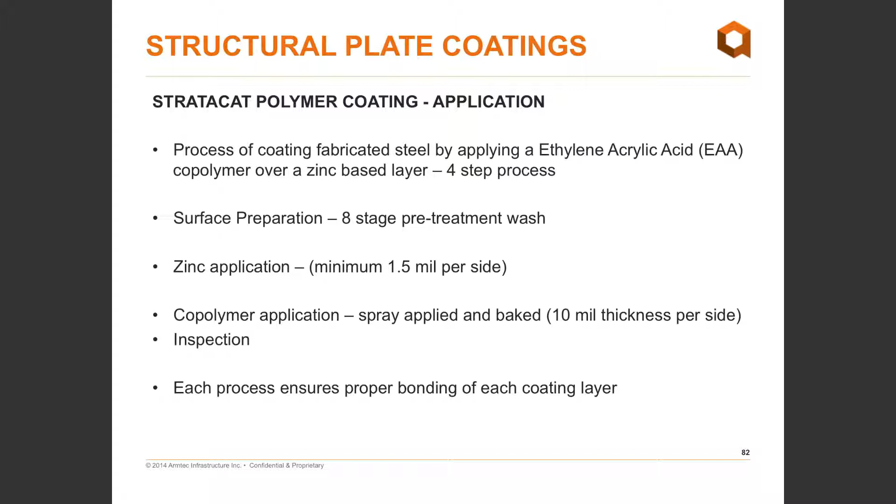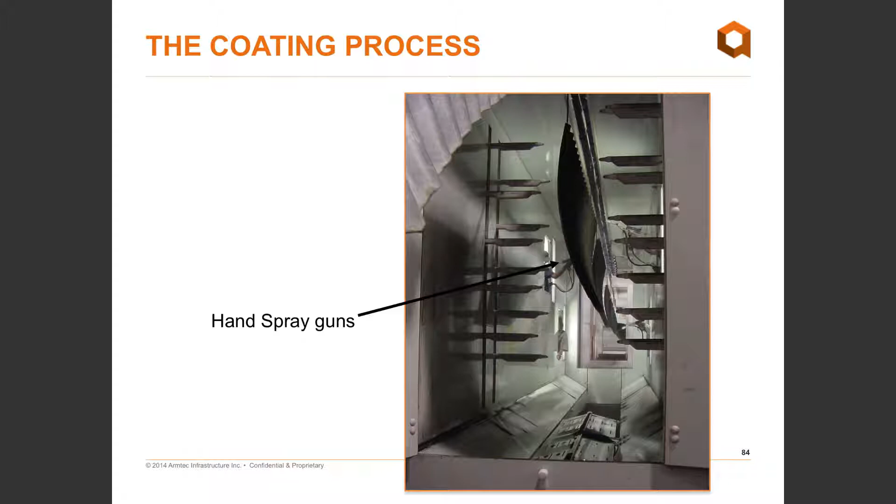Here you will see multiplate going through the spray booth at the coating supplier. You can also see workers with hand spray guns touching up any spots which may have been missed by the automated process. Here are the plates entering through the oven, and here are the plates when they came out of the oven and are ready for shipment.

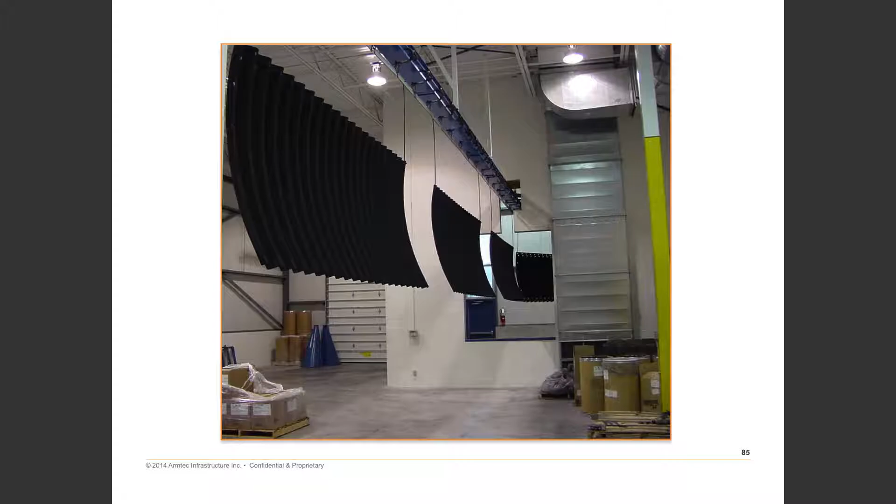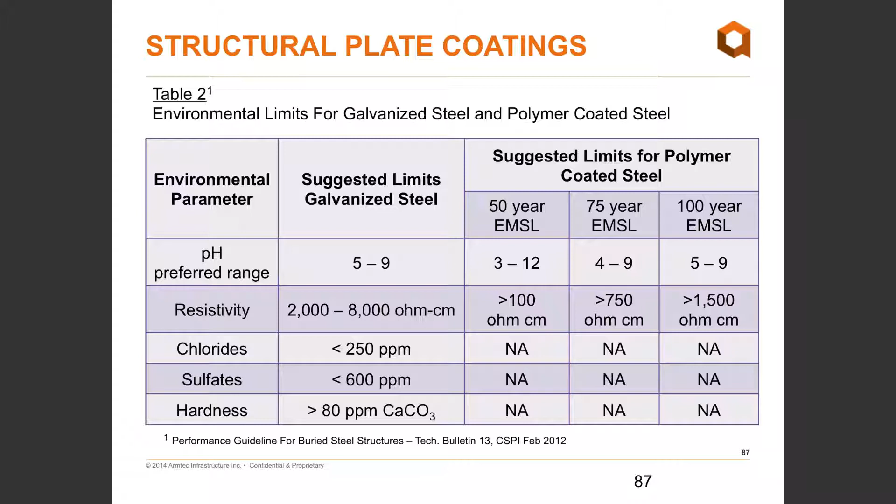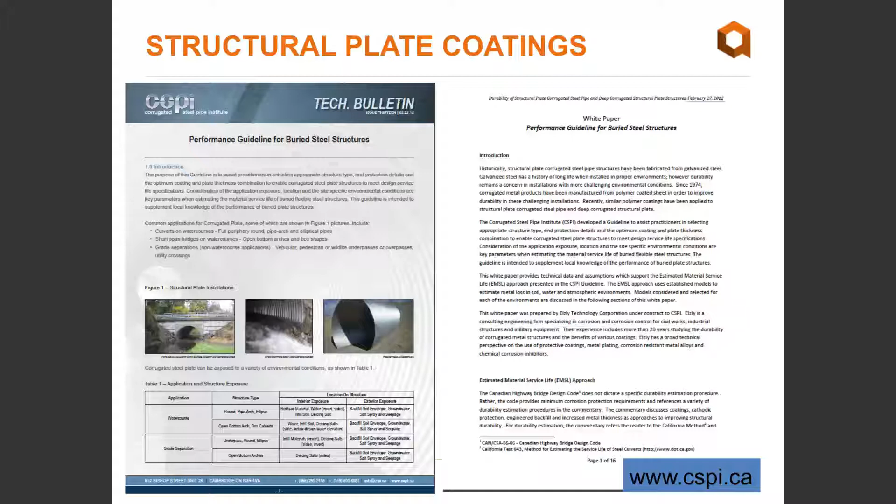This table can be found in the recently published Performance Guideline for Buried Steel Structures. This 17-page comprehensive guideline, released this past February, is published by CSPI, the Corrugated Steel Pipe Institute, which Doug spoke to earlier. To complement the guide, it's also supported by a white paper detailing the science behind the document. Both documents are a free download from the CSPI website at www.cspi.ca. A flowchart is presented for designers to follow and step through the process of selecting a coating to meet their application's demands. Any of this material can also be provided by your local Armtec representative.

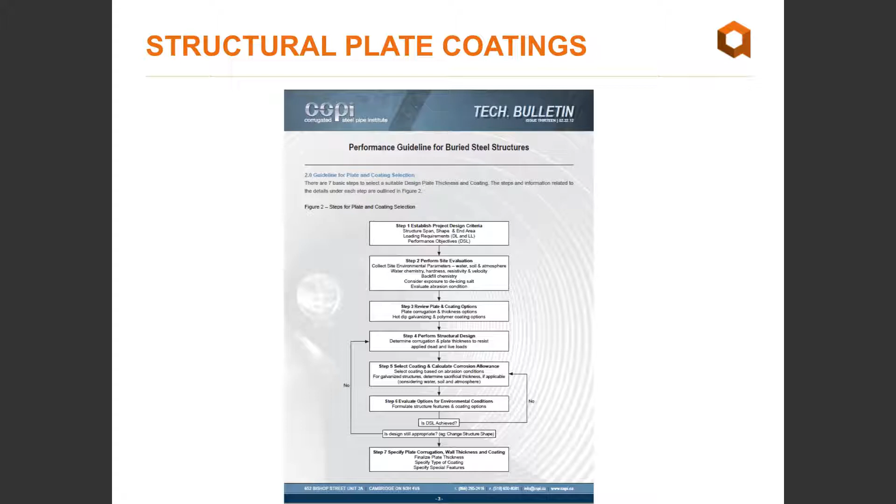So this concludes my portion of the webinar, and I'll now turn it back over to Janine for final comments and questions.